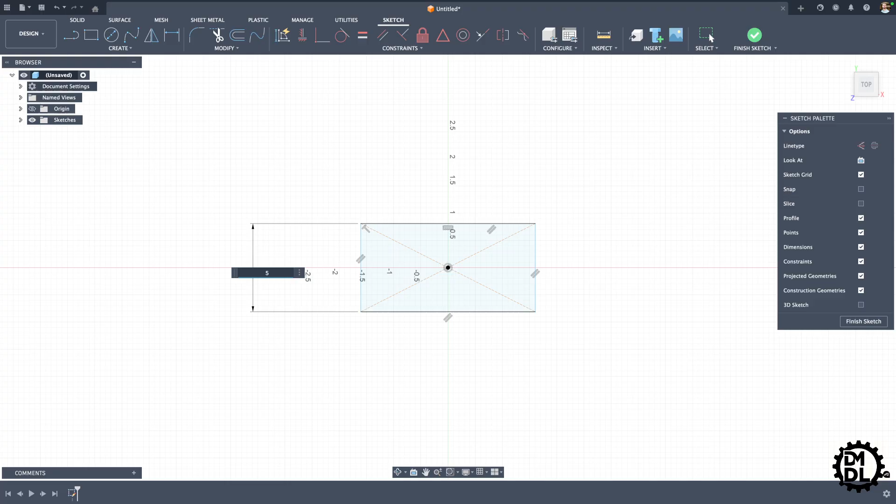Let's start off with a sketch. Put it here on this surface. Let's turn this around so we're looking straight down at it. We'll start off with a rectangle. We just want to make a plate of some kind to be our base that we will start designing a hole pattern on, and then I'll show you how to create holes.

Let's make it 6 by 12. Okay, extrude it out. Let's make it a plate, 1 inch thick. It is a plate, 1 inch thick.

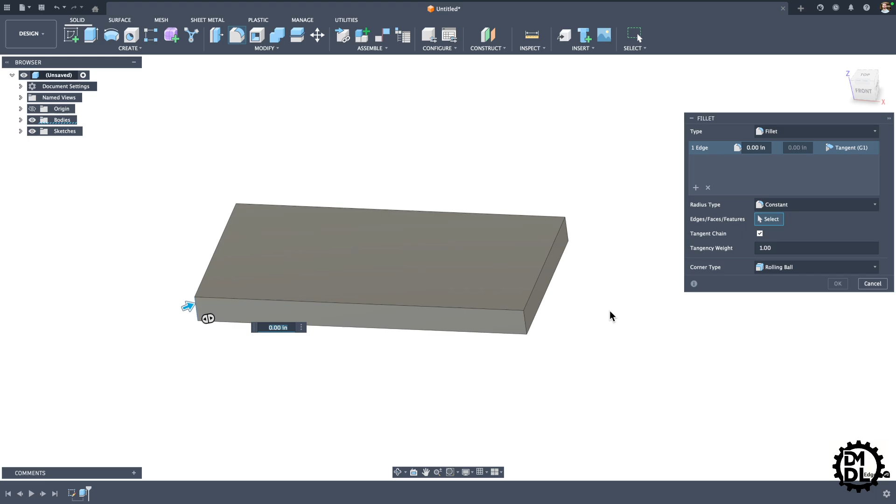Nice, and while we're at it, let's add some fillets, just to make this thing look good, like a real finished product. 1/4 inch on those. And let's add a chamfer up top and on the bottom, little edge break, never hurts anything. Okay, so here's the plate we are going to start with.

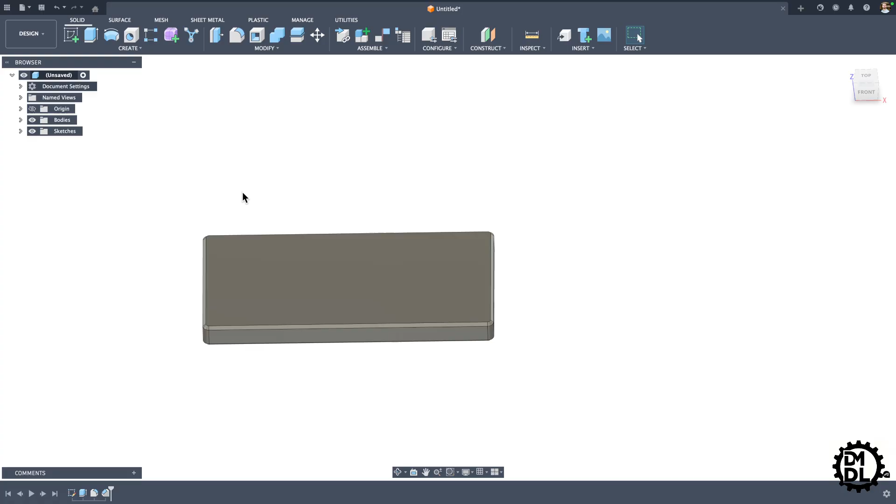So let's add some holes. The hole tool is located up here in the toolbar. We click on that, it shows you can do a single point placement, you can do multiple holes, but we're going to need a sketch of some kind that we can actually click holes or points to add our holes. So let's cancel out of that.

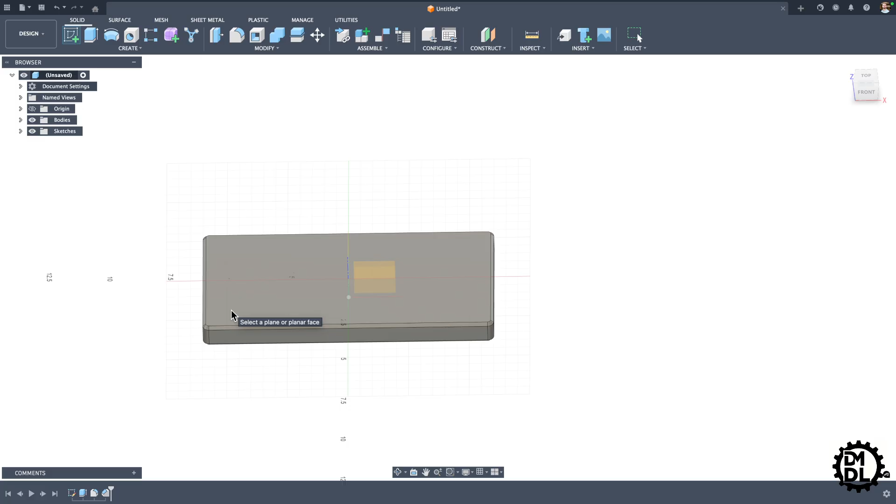Let's create a sketch. Click this top surface and let's create a few points where we can add our holes and go through the hole tool. I want these to be construction. Click here, okay.

Let's make this a little pattern. So let's just add a few of these in kind of a random pattern. Okay, that's good enough. Let's make a few of these things equal to each other. Those are the same height. This section should be equal to this section.

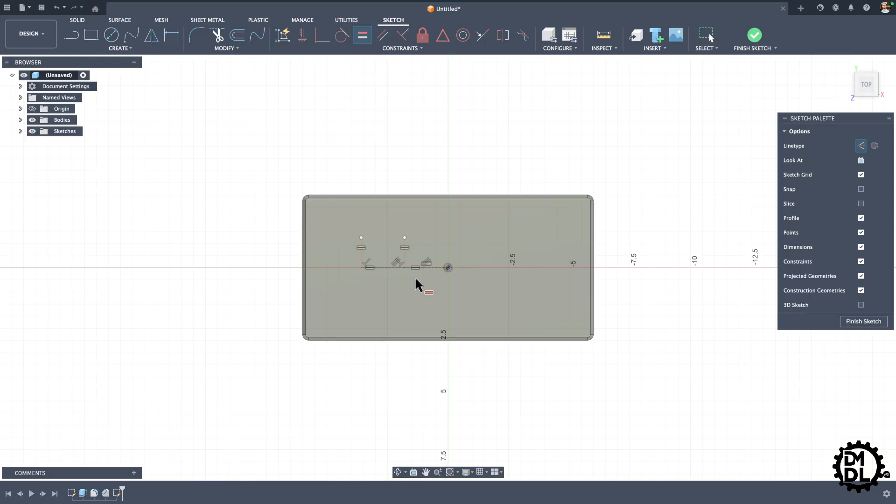Then let's add some dimensions. Make that 1 inch. Zoom in a little bit here so you can see. And then the height, let's make that 1 inch as well.

And just to make this more obvious, let's add some points. Point here, a point here. And one other thing that I can show you is, let's say we want these points to be mirrored to the other side. We'll go up here to mirror, objects, click those two. Let's throw these construction lines over there as well. Mirror line, go there, and now we've got a total of 6 points. This is a good enough place to start.

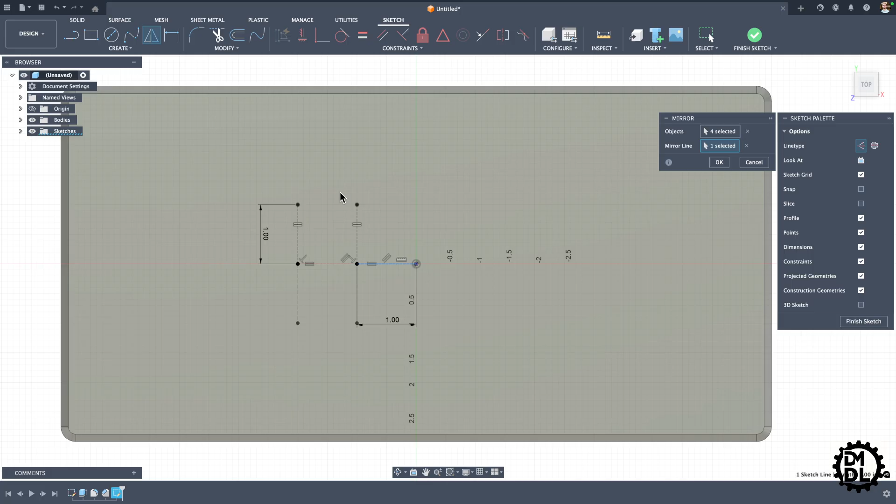Finish that sketch, and okay. Let's check out this hole tool. So the first thing to do, let's say we're going to click multiple spots, click all 6 of these points. And as you can see, it's already showing you what the hole is going to look like.

It is currently set as a hole type, as a counterbore. And then the hole tap, you can choose simple, clearance, or an actual tapped hole. In this case, since we are doing a counterbore, we want this just to be a clearance.

And then if we come down here, we can set what the standard is, the fastener type, right now a socket head cap screw, and the size. And then it will automatically create the size of counterbore and through hole that we have specified over here.

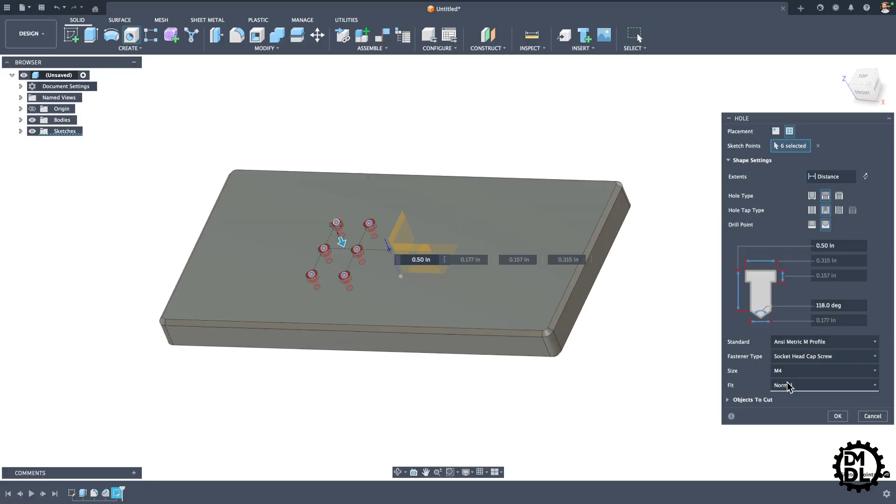The fit we want to be normal, but you can also do a close fit, which just reduces the inner diameter of that through hole, or you can go to loose if you want a larger diameter for the through hole. I like to stick with normal, so this will work pretty well. Hit OK, and there we go.

We've got 6 counterbores for M4 screws. One other thing we should go through is some of the other dimensions on this. Right now it's set to go a certain depth, but in this case we probably want to go through everything, make it a true through hole.

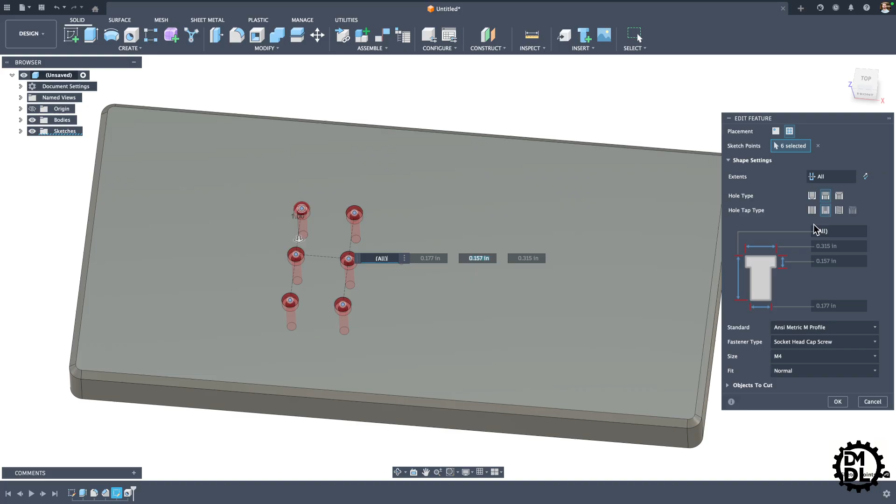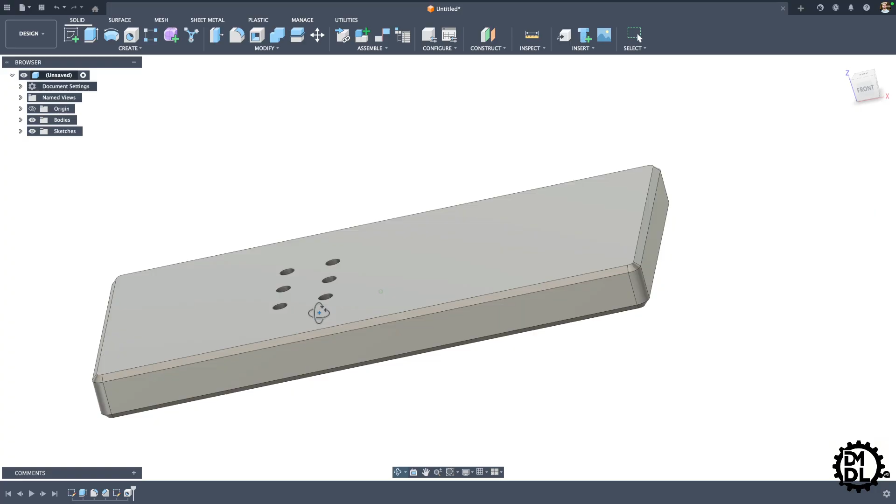And you can see here we have through holes. So that's pretty basic, a really quick way to add a hole with the geometry already defined by the software. You don't have to look up any standards or hole sizes or anything like that. And this is for a clearance hole.

What if we want some tapped holes? Let's add some tapped holes to this plate. Let's go back into our sketch.

Let's say we want 6 more points that we can use to add these tapped holes. So I'm again going to add a construction line. Here I'll just bring it vertical. Let's stop it there, just on the center point along that chamfer. And let's go ahead and mirror the 6 points.

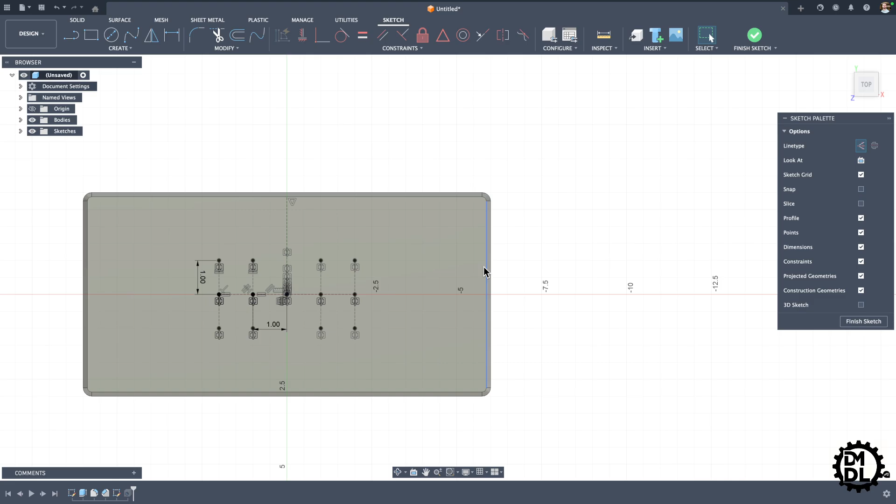So the objects we want to mirror, we'll click all of those. And if you want the construction lines too, which can be helpful, we'll go ahead and mirror all of that. Go to the mirror line, we'll select here, and there's 6 more points for us to add holes. Hit OK, that's done, finish the sketch.

Let's make sure that sketch is visible so we can see where these points are at. Let's go back in and create a new hole tool actually. We will leave those counterbores for now.

This time we want to select multiple holes, so we select these points. You can see it's set to what we used before, which is the counterbore, but let's go ahead and change that. Let's make this simple. The hole tap type, we want to be tapped.

Okay, come down here. We got the right thread type, the size. Let's see, let's actually switch this. Instead of using the unified screw threads, let's go to an ANSI metric profile.

Let's make this a bit larger. Let's go up to 3 millimeters. Designation is an M3 by 0.5. You have your class and the direction. All of these things are adjustable, but for now we will leave that alone.

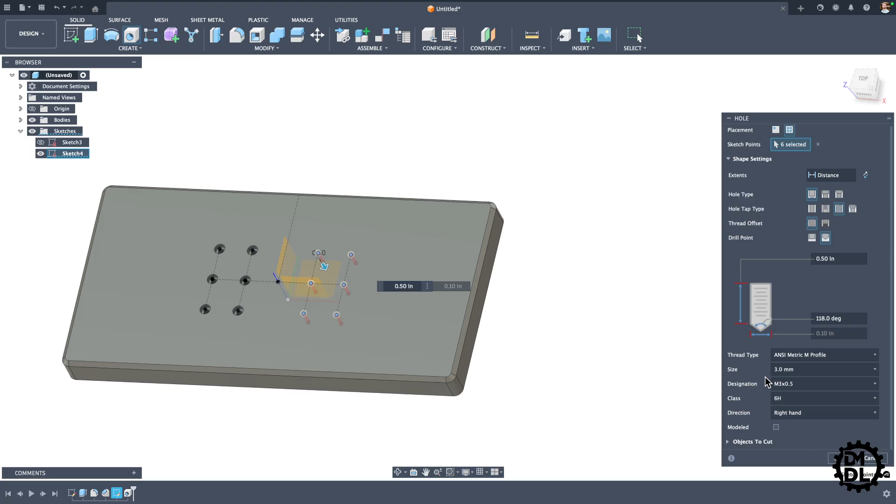You can see it's already showing us a preview of what these tapped holes will look like. Let's bump it up to, let's go to 6, it's an M6 by 1. Hit OK, and let's go ahead and hide the sketch.

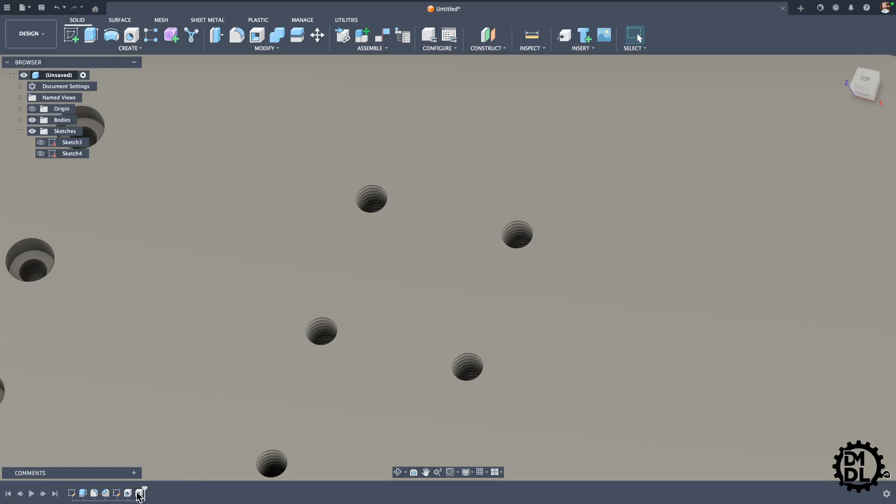You can see we have our tapped hole down to a certain depth, which, as I mentioned before, you can define right here. Right now it's a 1/2 inch. We can make that a little bit deeper. Let's go 0.6, and there we go.

So that is a really quick introduction to the hole tool. You can see all of these presets for different types of tapped holes or clearance holes are built into the tool. Makes it very quick and very easy to add holes to any part you have.

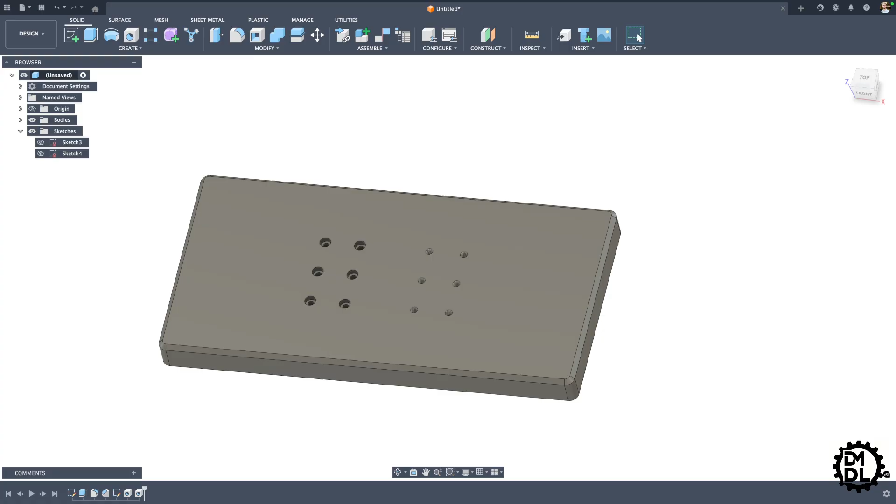So that's it for this quick tutorial on the hole tool in Fusion 360.